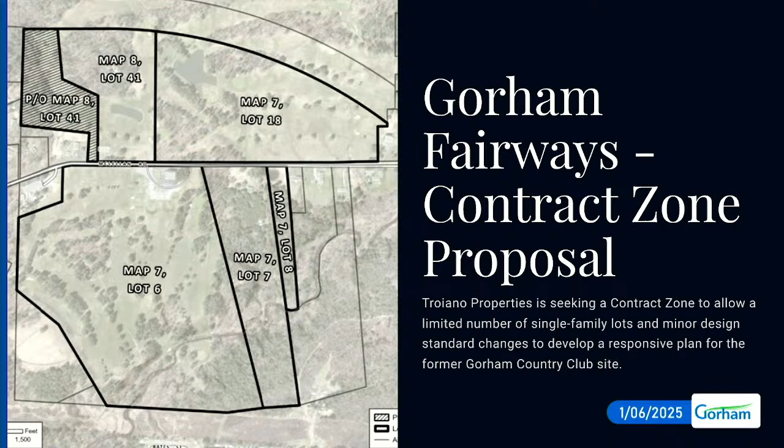So there are really three provisions at the root of what the contract zone language is seeking here. One is to allow single-family or duplex residential units, with the number of those units capped at no more than 8% of the master plan's full build-out of multifamily units.

As part of that, and after discussion with the city council, the zoning language seeks to establish a minimum and maximum lot size for those single-family residential properties. It's proposed as a 5,000 square foot minimum and a 10,000 square foot maximum lot size for the single-family residential component.

The third provision is really an amendment to the performance standards within the South Gorham Crossroads District. As you recall, when we reviewed the Gorham Fairways, the Residences at Gorham Country Club project, there's a maximum block length provision. The South Gorham Crossroads District was envisioned and laid out as a fairly traditional, uniform block pattern, and that works pretty well in many areas of the site, like we talked about in the master plan.

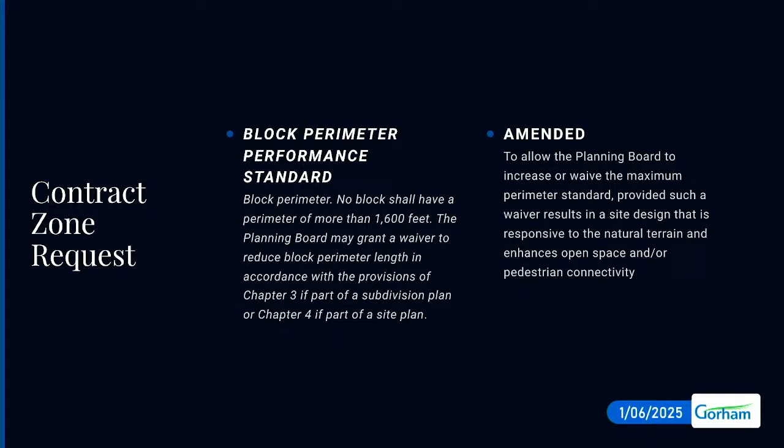The planning board can grant a waiver to reduce the block perimeter length in accordance with provisions of the ordinance, and we're simply asking that the language be amended to also allow the planning board to increase or waive the maximum perimeter standard under certain conditions—specifically, provided that such a waiver results in a site design that's responsive to the natural terrain and enhances the open space and pedestrian connectivity of the site, which are two important pieces of the comprehensive plan and the zoning district's current language.

So anytime a contract zone is proposed, there typically has to be a public benefit associated with it, paired with compliance with the underlying comprehensive plan.

The public benefit that we discussed with the council, and that's presented in our application, is the extension of public water and sewer to the site. That infrastructure support will not only benefit this project but the surrounding area, addressing some long-term well issues and increasing value for properties that can connect to it.

Compliance with the comprehensive plan is spoken to directly. The comprehensive plan's infrastructure goals section provides several goals for the community, including providing appropriate infrastructure to support development in those areas of the community where growth is desired, or designated growth areas, which we're in.

It calls for the availability of public water and sewer as a tool in managing the development pattern of the town, to direct most new development to the designated growth areas. The lack of water and sewer is really the only impediment to achieving the high density that the Crossroads District calls for—it simply can't be supported without that infrastructure.

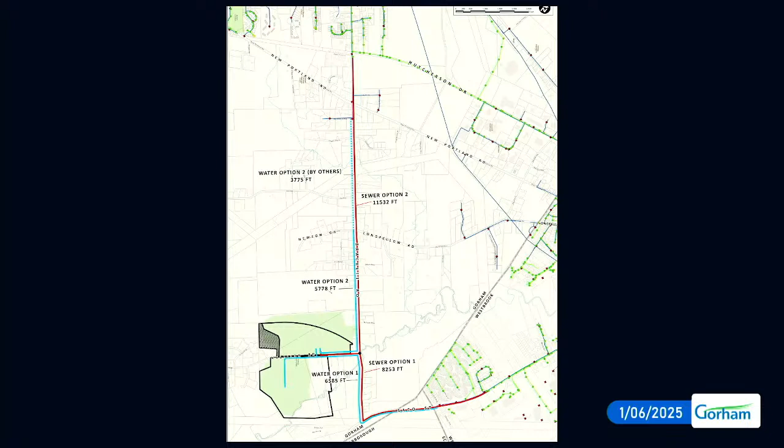The issue on the screen, which the board is familiar with, is that there's a $6 or $8 million infrastructure bill related to extending public water and sewer to the site. The nearest public sewer in Gorham is at Hutchinson Drive to the north of the site, over 11,000 feet distant from the project site. Water is somewhere between 6,500 and 9,500 feet from the site, depending on which direction it's extended from the water district's existing system.

As Nick alluded to, the single-family residential component with the proposed limitations is intended to directly support the ability to build that infrastructure, not only by offsetting the cost through the sale of the lots, but the timing of that sale and the cash outlay the developer benefits from is a really important component. It allows the developer to spend money to bring infrastructure to the site, construct a roadway, and start recouping some of that value by selling lots, compared to also having to outlay investment in actually constructing buildings. There's a timing aspect that Nick talked about and can speak to in more detail if necessary.

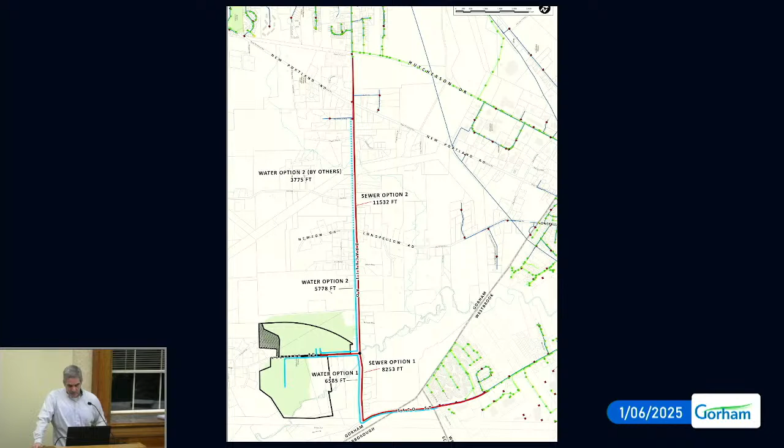To talk about the program and plan we prepared in developing these provisions, shown here is a copy of the plan. What's currently proposed is a mixed-use development, envisioned with a program of 824 multifamily units combining apartments, townhouses, and mixed-use commercial and residential buildings with commercial on the ground floor and residential above. There's a component for 64 single-family residential properties, derived as 8% of the multifamily unit count, and a commercial component between 60 and 76,000 square feet. The plan also includes a minimum of about 20 acres of conservation land, primarily around the Stroudwater River and the south portion of the site, tied together through a pattern of open space and trails open to the public.

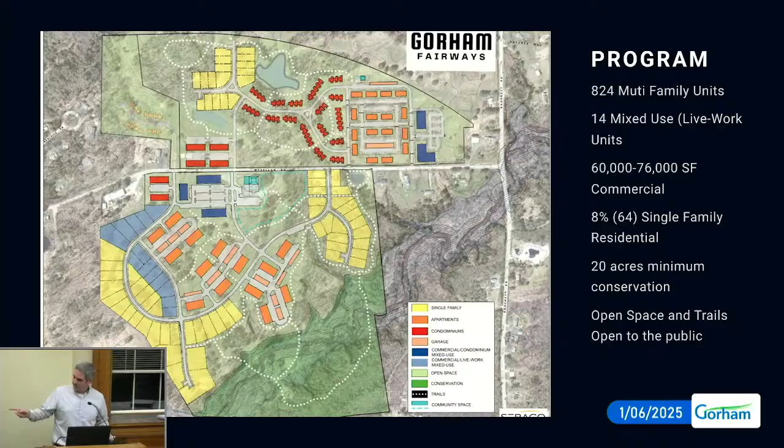I think to give some context to the layout of the plan here... we're frozen. We'll talk from here. Oh, there we go. I'll talk from the plan here.

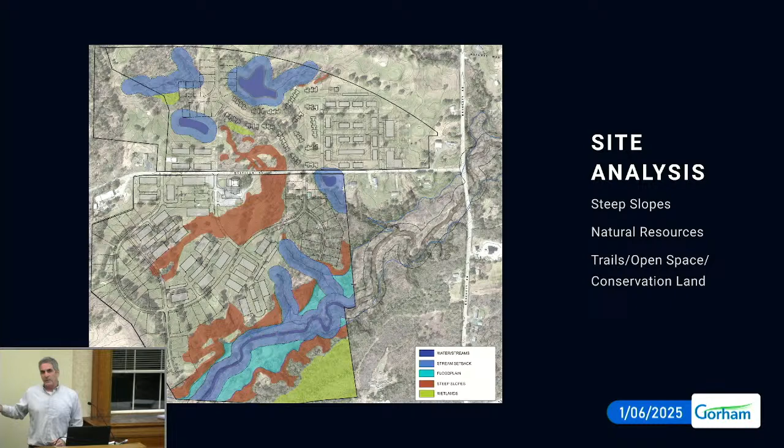In the development plan before you, the different buildings are color-coded to identify program areas. The dark blue buildings are your commercial and mixed-use commercial buildings, with commercial uses on the ground floor and residential units above. You'll recall from last summer's discussion on the master plan for the Residences at Gorham Country Club that we developed a plan including that mixed-use component in this area. A similar component is proposed on the south side of the site. So blue represents your commercial and mixed-use commercial and residential program.

The orange shaded structures are apartment buildings, with a design familiar from the approved master plan area for the Residences at Gorham Country Club. Similar buildings with garages are proposed for the south side of the property in the center of the site. I'll talk more about why these are located where they are in a minute.

The rust-colored buildings are your multifamily residential component. Townhouse-styled units using a design very similar to the Fairway Commons project approved last fall would be located in this area, and the rectangular buildings represent a traditional multi-story condominium building with units on multiple floors.

The blue, light blue shaded areas that give the appearance of a single-family lot are what we're proposing as work-live units, a concept that the planning staff asked us to consider and build into the program. This is envisioned as a residential-scale building that would include a commercial space and a residential space in a single structure or in an accessory structure on the same lot.

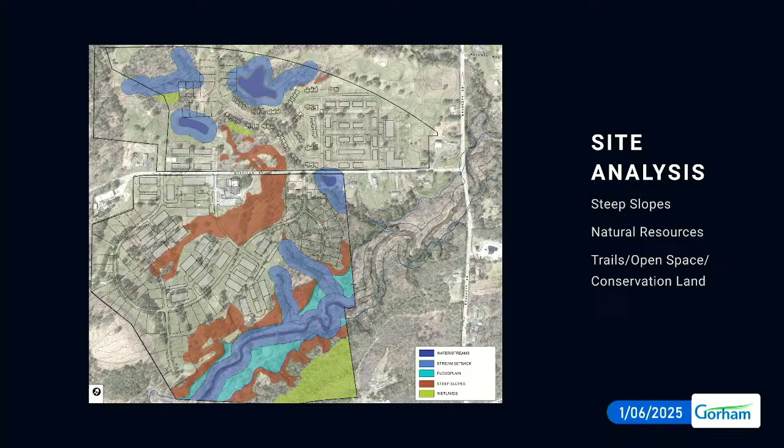As we tried to lay that out in strict accordance with the block standard, it became a little problematic. There are areas of the site, particularly on the north side, where the slope is relatively uniform and conducive to that traditional lot layout, but there are certainly areas to the west and south side where we have relatively steep terrain.

Trying to use that traditional village gridded layout pattern becomes difficult in terms of the amount of earthwork you'd have to undertake to support the parking and development.

So the concept here was to provide a dense core of commercial, mixed use, and higher density residential, and then surround that on the periphery with reducing density. We've located the single-family residential on the periphery of that, taking into account some of the patterns traditionally seen in Gorham and other village areas.

I'll skip ahead here. My computer seems to be locked up.

When you overlay that site analysis and start laying in the roads and different programmatic elements to follow the terrain, the conclusion was that providing enough roadways to meet the standard block length can be achieved in some areas, particularly the area already reviewed in the master plan, which is conducive to that 1,600 linear foot limit. Other areas, particularly where the roadway follows the contours through the project, are more difficult, since forcing a shorter block length drives roads into places that aren't conducive based on the terrain.

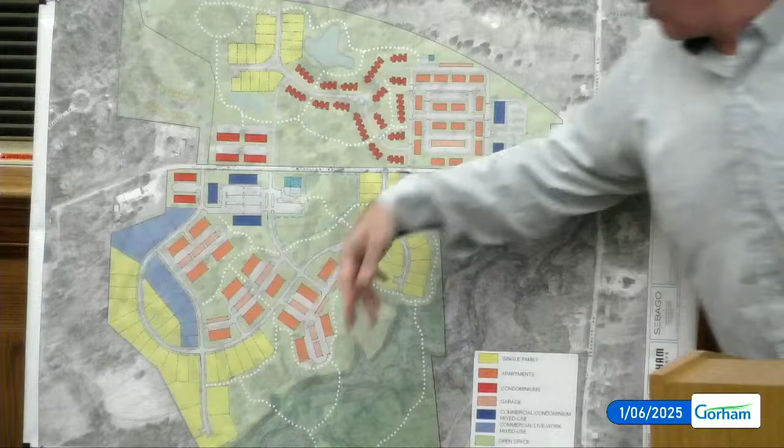Well, I know you have the townhouses already. In the master plan, when we were only looking at this property, that would be the first phase. But with the revised plan, the single-family road or the access for the single-family would be part of that first phase under the revised scheme.

And I think once we know whether or not this use is going to be allowed, we still have to come back through the whole master plan process with the planning board to work out more of those details in the design.

But under the contract zone as proposed, the utility infrastructure would come to the site, and then the applicant certainly intends to develop the roadways to support the single-family lots, be able to sell those lots, and then pursue the other components that they'll build themselves. So that's how the layout's envisioned.

So exactly what the phasing and timing of it is, I don't know, but certainly the single-family, we would look to have that as part of that first phase. So just lastly, it would be helpful to see that phasing when you get that done.

Okay. All right, thank you. Appreciate it. Thank you, Mr. Walker. Councilor, please.

Yeah, sure, I'd just like to follow up on some of that. I appreciate the comprehensive review you gave us, and I also appreciate the fact that we're going to get public sewer and water to the site, which is something we talked about originally. So again, I appreciate those efforts as well. I think that's a benefit to the town.

I do want to state publicly for the record that if this gets approved, it goes back to the town council — we're talking about the contract zone. As you indicated, any site plan has to come back to the planning board. So for the public, what you see here is not the approved plan. This is a discussion and concept so we can get the contract zone approved, and then the plan actually has to come back and we go into much more detail on the buildings and the phasing and the rest of it. I just want to be clear to the public that whatever happens tonight, this isn't the last time it's seen. It has to come back and we have to go through a very detailed site plan review and approval process.

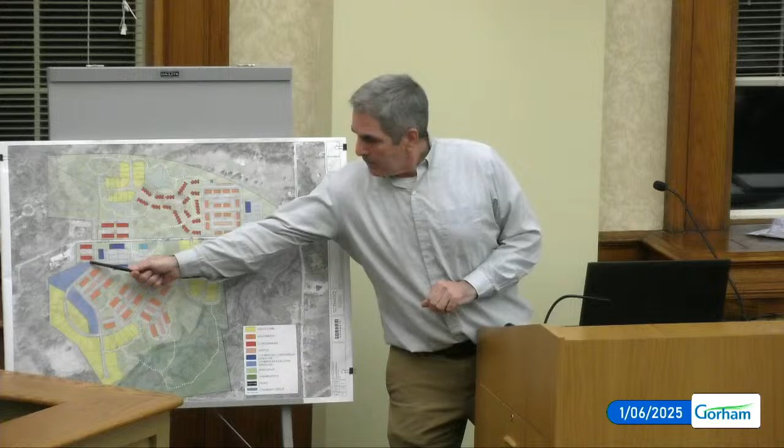Yeah, the ones you pointed to first on the far east end, those are the ones I was thinking about and focusing on, because it seemed like Barbara, you were talking to the three of them on that side.

Yeah, and I think the ordinance has some clear requirements. I have to read what this zone particularly says about outdoor storage, but whatever is in that district now related to exterior storage would be adhered to, because we're not looking for any modifications or revisions to any of those parameters. The only requests really are the use to allow single family with some space restrictions and a cap on the number, and then the one provision related to block length. Any other development standards would be as they're written in the current zoning ordinance.

So if the existing ordinance did permit some form of outdoor storage, would you consider restricting or eliminating the outdoor storage for certain of your commercial buildings?

The way we look at it is we're trying to create a community, so we want everything to be clean and presentable, right? So we don't want trailers backing into people's houses when there's young kids walking through on sidewalks. We don't want cars left up on jacks at a mechanic shop. Not that there's anything wrong with that, it's just not great for a community feel, especially when you already have the industrial park. There's plenty of space for that, plenty of space in other towns, plenty of space in Gorham for it. We need to focus more on the housing aspect and giving people places to live, and keeping a clean, safe environment for everyone. That's why we're focused on that, not because we don't want to see it, but because there's a lot of liability when it comes to that, especially under an HOA.

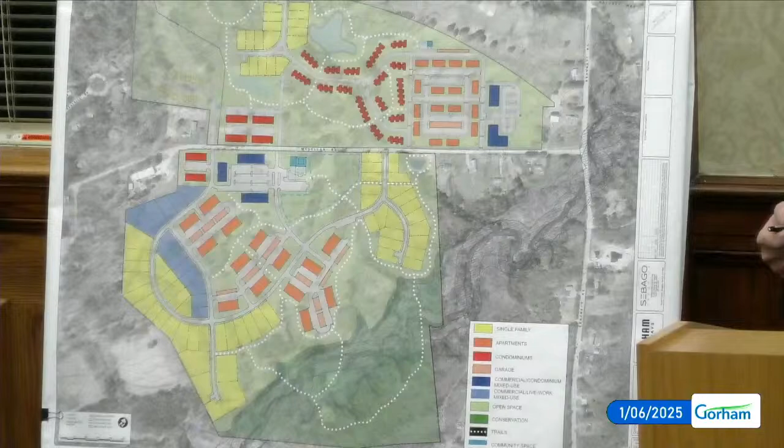I would like to begin in the northwest corner. The original 14 units, that is not part of this contract zone, is that correct? Because we've already settled that, you're good to go on that, it's excluded from this contract zone. It's everything else, the rest on the north side of McLellan and everything on the south side. That's correct. Okay, thank you.

You mentioned 64 residential units, and again, don't get upset with me, but every single one of these little yellow blocks represents a single-family residence, is that correct, the idea? A lot, yep, so I have 65. I'm going back to Mr. Frank, because we had a project not too long ago where we were nitpicking the numbers, and don't get me wrong, I know it's preliminary, but I see 65 - 48 on the south side and the remaining on the north side. We were talking about perhaps developing the south side, those 48 units, or selling those single-family homes, if I get that correct. Yep. I'm looking to the planning department, we have this language here. What impact does that have on this sketch?

It will direct the master plan. So if you look at the language, 8% is the number for single-family houses. I understand that. Thank you.

So that will govern what the master plan can do. When he comes forward with the other residential units, say for instance he reduces how many multifamilies and other units he has there, that will reduce how many single-family houses he gets to make sure he's under 8%. Now if he goes the other way and increases it, it goes the opposite way. So 8% is really the target we're looking at as a contract zone, not that the master plan is a good representation. I think Dan Riley can say this is right-sizing for this parcel, and through his presentation showed how he got there.

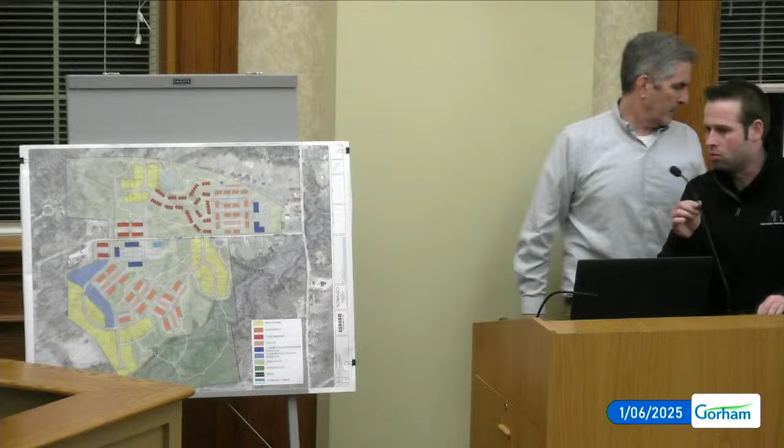So overall, what we're looking at is there's plenty of open space here. What we're really focused on is trails, people being able to park their car. There's actually a community parking lot already set up right here, which is just obviously in a master plan for off-site people being able to park and come, whether it's out-of-town people, out-of-city people, whatever it may be, and be able to come and join the environment. The other thing too is it allows people coming to this area and creating businesses to have customers come from out of town.

But what we're really focused on is there's 2 community clubhouses. The 2 community clubhouses will have pools, gym memberships - people can walk in and use the gyms. There'll be pools, and quiet areas for people to go on their laptops, computers, work areas. So the apartment people can actually leave their apartment and have a second spot to work if they don't want to go to an extra bedroom in their units or something like that.

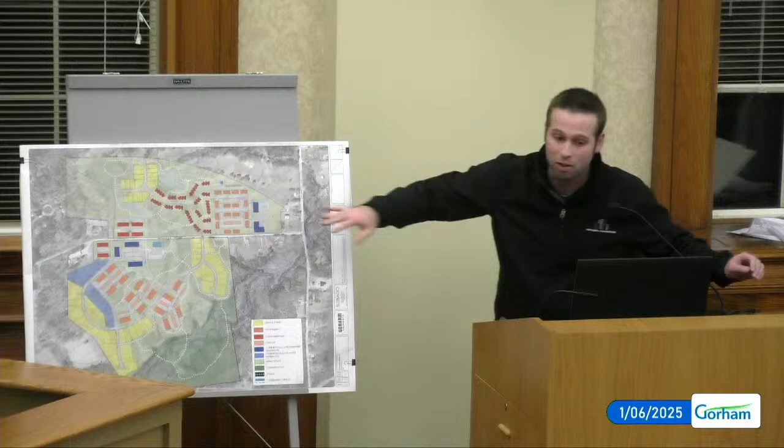Above and beyond that, there's a lot of open space here. I think in terms of development, there's probably more open space here than there would be if we were to follow the performance standard. Right now there's a lot more open space, a lot more trails. If we followed the performance standard the entire way, there'd be very little trails, more parking, more pavement. So what I'm trying to say, focused on everything we've talked about, is less trees getting cut, more land left the way it was, not disturbed. Trails for the community, pools, gyms, all that type of stuff - in terms of open space, sledding areas, maybe not during construction, but overall long-term. So that's really what we're looking for in the forefront.

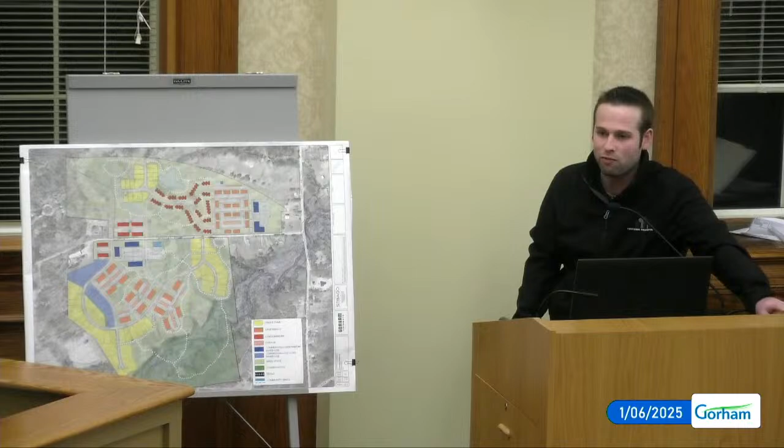Thanks, Mr. Walsh. Yeah, as we're speaking about performance standards, I start thinking about the impact - we've talked about the site, but we haven't talked about the impact on McClellan, the impact of traffic, or the impact on other roads feeding this. So how does that factor in, is there a place for that in the contract zone?

No, because they're not asking for any reduction in any performance standards. So when they come forward with traffic for the site and the development, they have to meet all the performance standards. They're not asking for any relief from performance standards regarding traffic, so there's no need to add a provision to the contract zone identifying that they need to meet it - they already have to meet it, and they're going to be required to meet it. So just so I understand this, once built out, obviously there's going to be a greater impact on McClellan.

If McClellan needs to be rebuilt to handle additional traffic, if the intersections with adjoining streets need lights added, other signage, turning lanes, et cetera, will that all come under those performance standards? Correct, they'll be reviewed by us as well as the DOT. My guess is this will require a traffic movement permit, so the DOT will weigh in on traffic movement throughout the site and off-site as well.

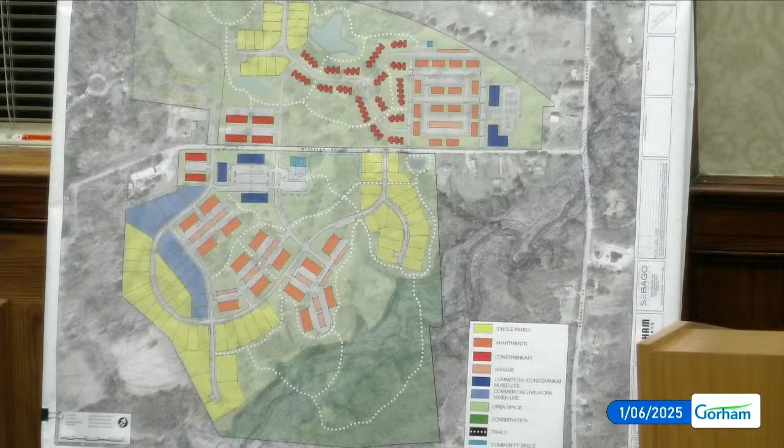Just a word to the wise, I would plan on having this road in anticipation of what the performance standards are, be ahead of the curve. It is going to be a monster. Oh yeah, the project's going to require a full traffic movement permit through the DOT. That'll outline the whole study area, identify intersections that need to be improved, and evaluate that. That's all part of the process, thank you.

Regardless of what the use is here, any project of this scale, whether single family or not, it's going to fall under those requirements.

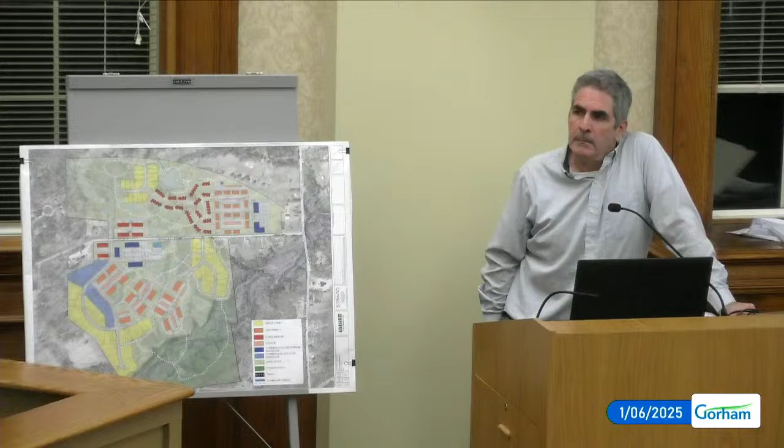Mr. Frank, please. Spot on about the traffic. My wife and I live to the west of this, off of McClellan, I forget the name of the development. It's been there about 30, 40 years. Anyway, McClellan is already basically an extension of the Gorham bypass. The traffic there in the morning and afternoon, because people are using it to get from Portland to Standish and whatever. My wife happens to work at IDEXX, so she goes east on McClellan and then tries to make a left onto Brackett.

Because of the lack of the bypass, that's probably not going to happen — McClellan is the new bypass. The difficulty on Brackett is you're heading south, the crown right by the flower shop, and sight distance — if you're traveling exceeding a safe speed, and all of a sudden everyone is coming off McClellan trying to get onto Brackett, that's... I think you got the message.

Anyone else? We have a couple of motions, if we want to take a peek. I guess I'm unclear — I thought unless we're changing language, and the only language I understand that we might add is on the right of first refusal on open space. Is that it, otherwise we don't have to vote on anything?

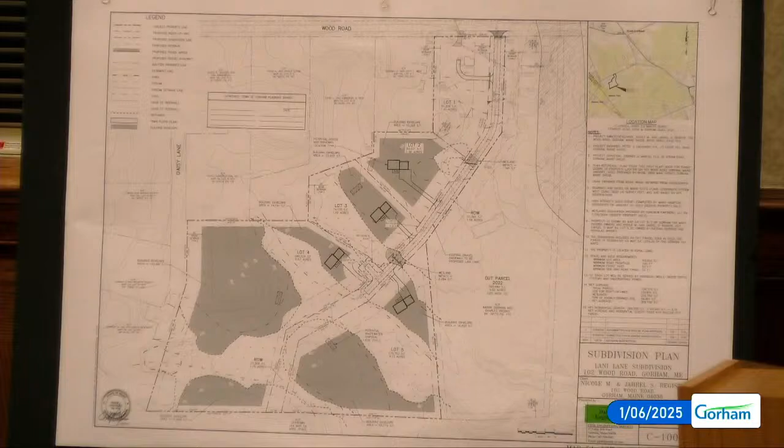Well, I don't know if we number it Lot 6 or what. We can do whatever you want, but we don't own that property. That's the out parcel, which is here. This is their house and their driveway, coming down to the house down in there. The reason it's on there is because the previous owner of the whole parcel sold it two or three years ago.

And it's a 5-year rule, anything sold within the last 5 years has to be on this subdivision plan. Is that state law? That meets the state subdivision requirement. So it should say Lot 6 where we say the out parcel? Labeling it out parcel meets the requirement as presented. Thank you, I appreciate that.

Ladies and gentlemen, any other questions? I'd like to refer back to our notes, starting on page 17. There's a lot of highlighted information, still on 17, 18, 19, 20, 21, and in fact on 23. A lot of information that's still outstanding. It gives me a little bit of distress. That's my opinion. I'd like to hear from each of you.

Yes, Mr. Frank. I wouldn't say I'm distressed, but I'm definitely not at ease with what I'm looking at here. Touche. Mr. Chair, I have similar feelings. I think there's a lot of work that needs to be done on this. Honestly, I don't know why it's here tonight. I think the work was laid out in earlier documentation, and I honestly think the applicant is wasting this board's time tonight.